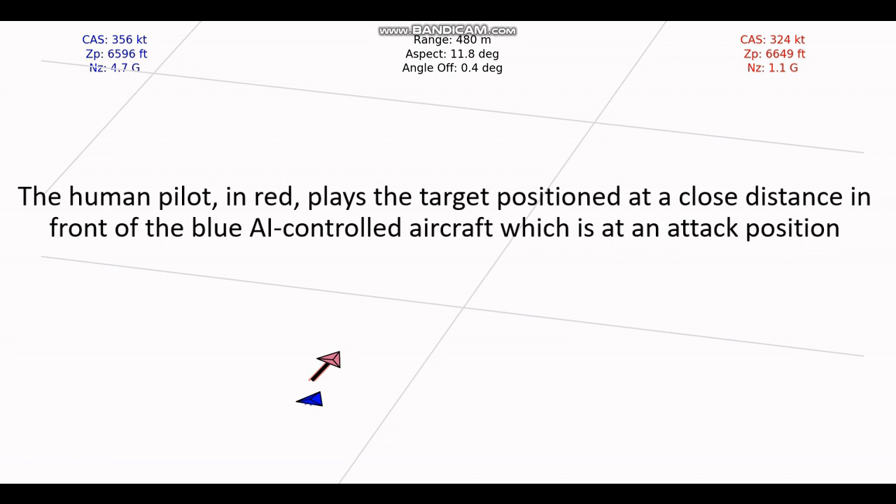The human target performs a break maneuver to exit the AI's missile firing envelope and to reduce the maneuvering space between the aircraft. The AI then initiates a high yo-yo maneuver to control the aspect angle and not to overshoot the opponent's longitudinal axis.

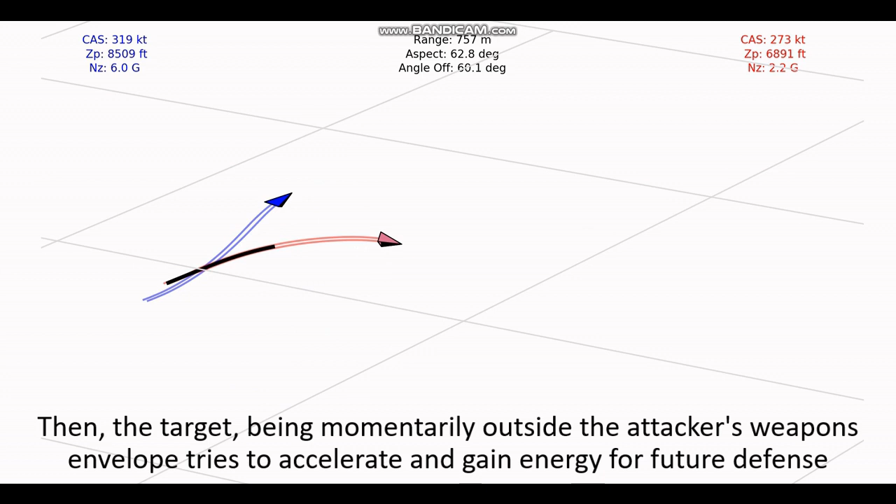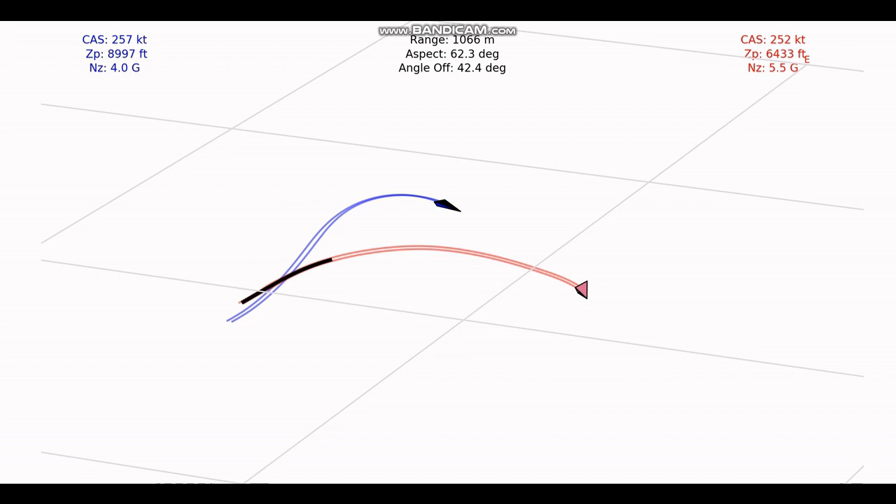Then, the target, being momentarily outside the attacker's weapons envelope, tries to accelerate and gain energy for future defense. The AI immediately turns its nose in order to threaten the target and stop its acceleration. The target now realizes he is threatened again and performs a second break maneuver.

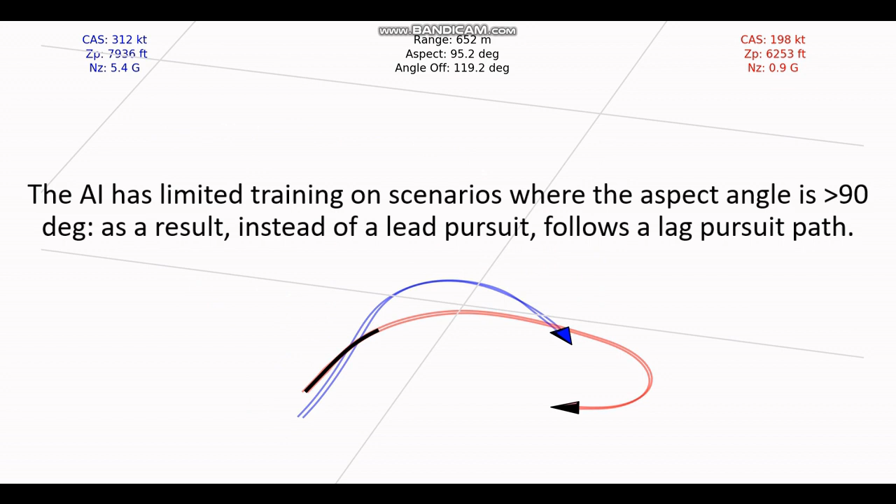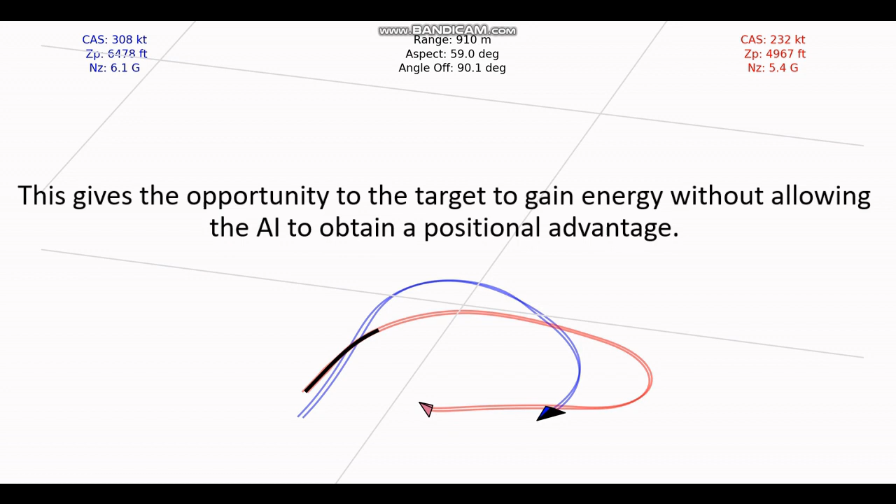The AI has limited training on scenarios where the aspect angle is greater than 90 degrees. As a result, instead of following a lead pursuit, it goes into a lag pursuit. This gives the opportunity to the target to gain energy without allowing the AI to get a positional advantage. The human pilot then uses the additional energy gained to perform a new, more effective break maneuver.

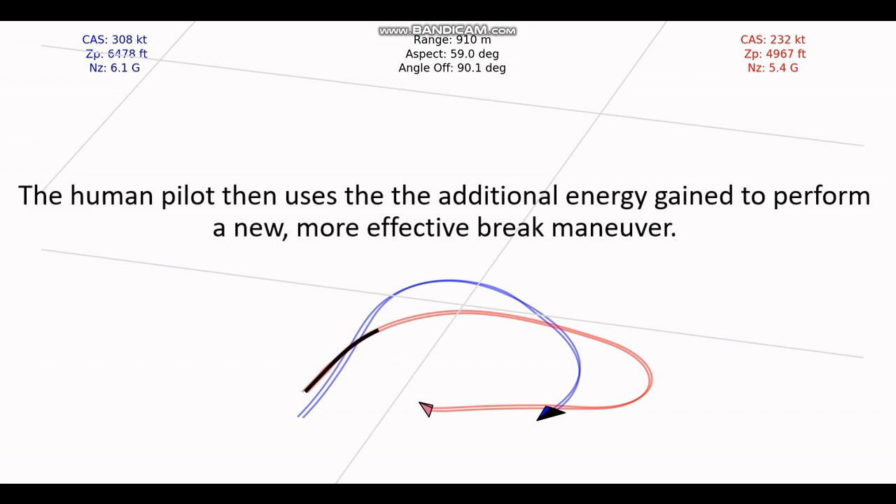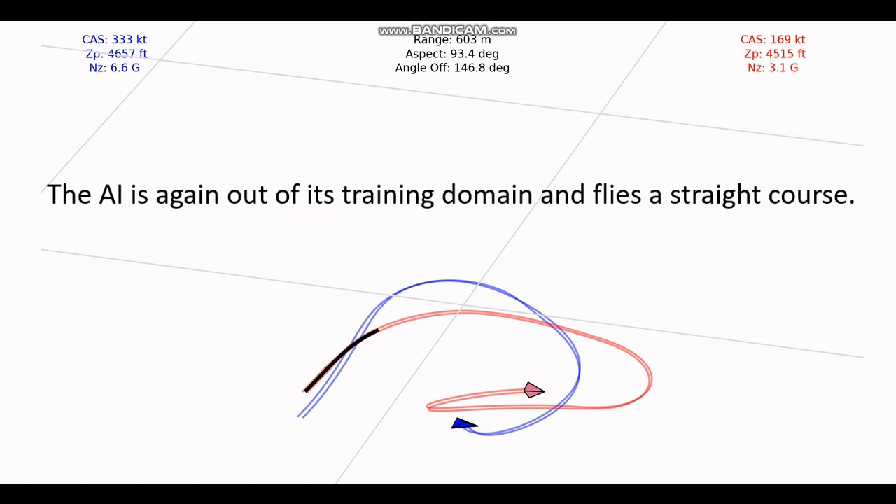This leads to a high aspect confrontation with the AI. The AI is again out of its training domain and flies a straight course. The human tries a counterattack, assuming that the AI will continue turning in the same direction.

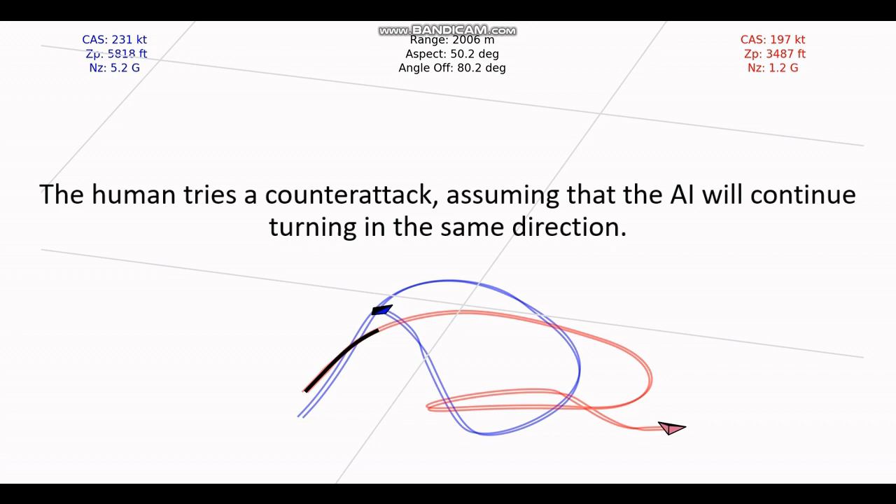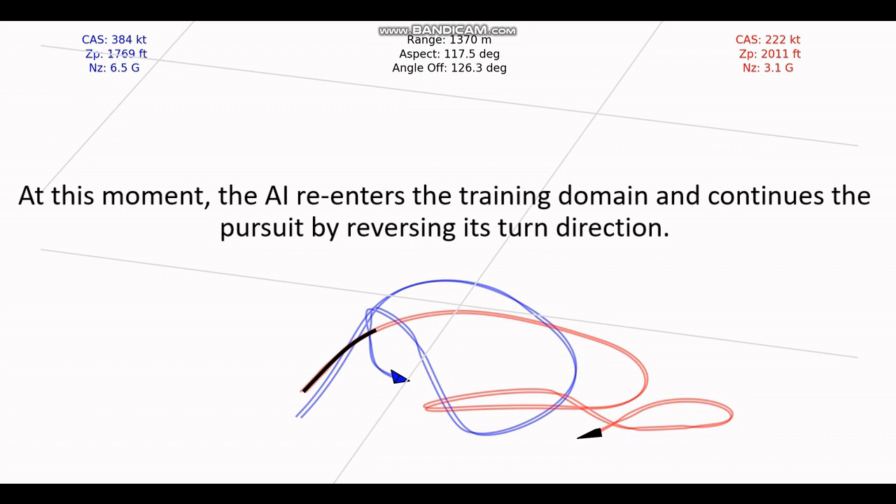Given the advantage gained so far, he tries to reverse his turn to benefit from a tighter turn radius due to his lower airspeed. At this moment, the AI re-enters the training domain and continues the pursuit by reversing its turn direction. This is a rather uncommon maneuver for human pilots, associated with a risk of losing visual contact. As a result, the human pilot momentarily loses tally.

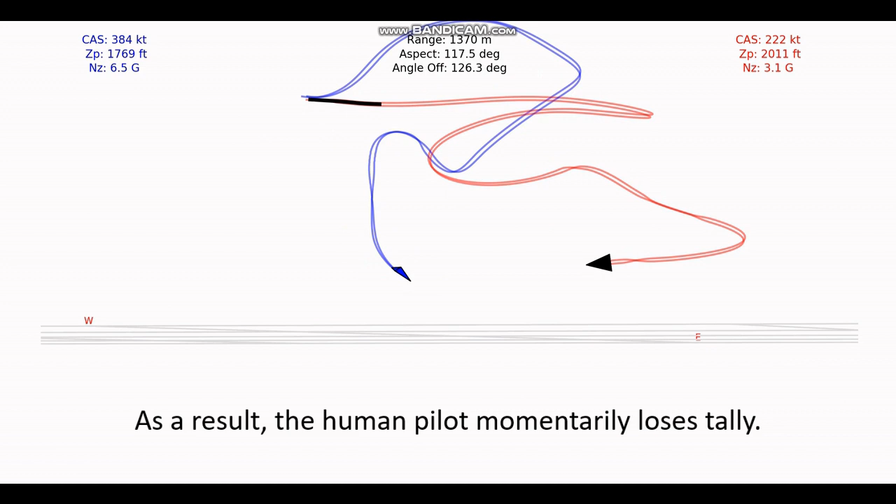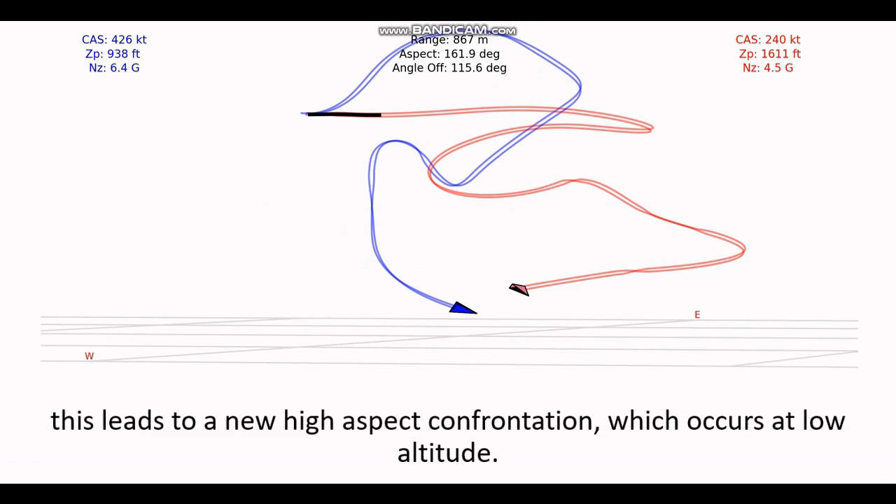Due to the two turn reversals, the maneuvering space between the two aircraft has become more extended. This leads to a new high-aspect confrontation, which occurs at low altitude. The AI is again out of its training domain, however it avoids crashing to the ground by pulling hard on the stick. This is a quite interesting recovery, given that the lowest point of the trajectory is very close to the ground.

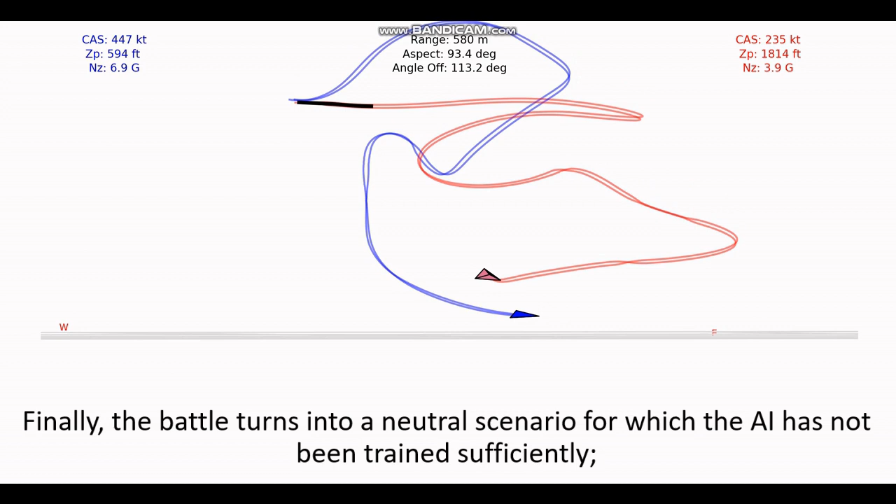Finally, the battle turns into a neutral scenario for which the AI has not been trained sufficiently. Therefore, it is out of the scope of this evaluation.